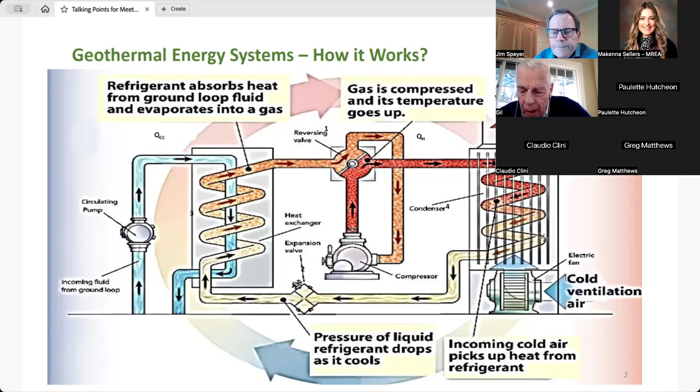Now, let me just say, and you can probably add to this, I was out at the Mountain Towns event just a couple weeks ago in Jackson and had a chance to talk to a lot of people. One of the things I found, which was very exciting for me, was how interested and relevant geothermal energy and other renewable energy is, in Colorado, but in the West and in Montana.

So you're depending on the energy that's been stored in the earth millions of years ago, as the Tetons and the Rockies were formed, that has captured energy from the sun and is stored in rock. And I did a couple cases, I'll come to them in a minute, about the actual applications of geothermal in that area. So in Montana and other Western states, of the people I talked to, it was universally well understood, well accepted. And so it seemed like this presentation and talking about this was very relevant.

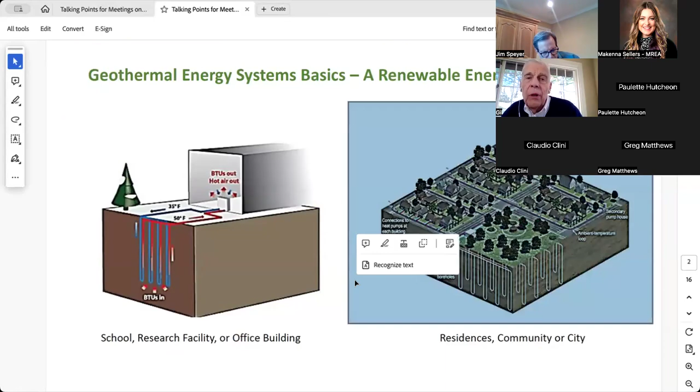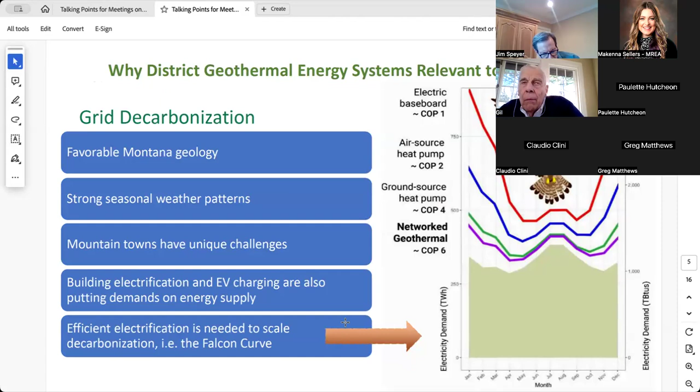Well, it's important because like in a school, in a campus, you can have different temperatures, you can have different ambient conditions in different buildings. And with a district geothermal system, in addition to this heat pump system and taking energy out of the earth, the district geothermal systems interconnect the buildings. So they can take energy that's in one building, say that's warmer at certain times of the year, and use it to warm up other buildings. So it has much more overall energy efficiency.

And you'll see that in here on the purple line right at the bottom, its coefficient of performance is maybe 6. So it's much, much, much higher than the other alternatives. And that's why a district geothermal energy system is such an interesting thing to look at.

It depends on our time and your level of interest, so we can do it in the Q&A. But I've done a number of detailed studies and investigations of actual real geothermal systems. Now, there's lots of hype and there's lots of conferences and there's lots of articles written about these things. But I thought that what would be important is to actually go out and talk to actual installations of these things. So to go back to systems that have been put in 10, 15, 20 years ago, and to see actually how they've performed, and to see what are some of the big characteristics to them. What are the big underlying messages from those?

Hey there, Gil. Would you like that slide up right now? Why don't we come back to it? I think, right now. Got it. Okay. I'll mention it later on.

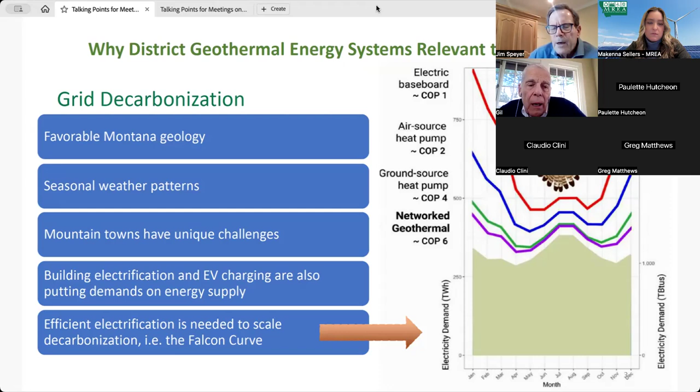Yeah, Gil, you may want to go to the next slide that basically summarizes your review of the existing sources. The big thing for me is you look: reduction in energy costs 30 to 70%. Reduction in electricity usage 25 to 35%, and then reduction in carbon 20 to 40%. Right. So to me, that's kind of the bottom line.

Yeah. Everybody asks that, right? They say, oh yeah, well, we're interested in this, but what are the bottom line benefits to it? And you can see these are sort of statistics that are often asked about. How much effect does it have? And as Jim said, this slide that I have up basically summarizes that. Right. Let me just say a few other things.

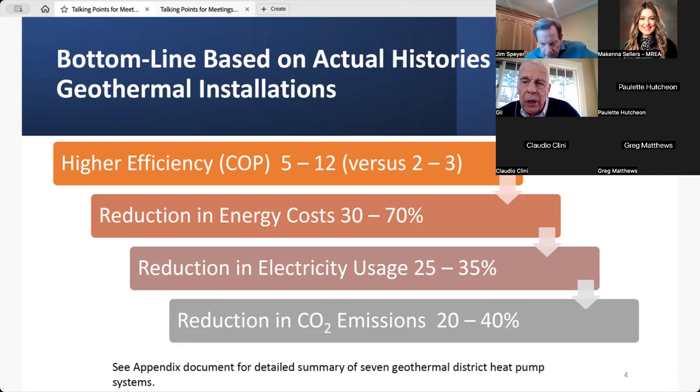So those are sort of the big number things, but there's several other things. Let me quickly go through this. First of all, these systems have been around a long time, particularly in Europe. They've been used since the 70s. So they're not a new technology, but they're a highly successful technology over longer periods of time. The detailed case studies that I mentioned talk about how well the systems have performed. They don't wear out. The operation and the maintenance of these systems holds up well over many years.

The systems work in colder climates, whereas an air-to-air system is getting better because the heat pumps are getting a wider range, but they're still kind of more for temperatures that are more moderate, with less of the extremes that you have, so these are good in colder climates.

They have no, and I'm exaggerating that a little bit, but there's no carbon emissions. In all the other systems, if you have natural gas, for example, which is often the alternative, you of course have carbon dioxide emissions. But the geothermal systems are great because there's zero on-site CO2 emissions, and therefore they're consistent with carbon reduction goals and objectives that you have in towns and cities, and of course the federal government.

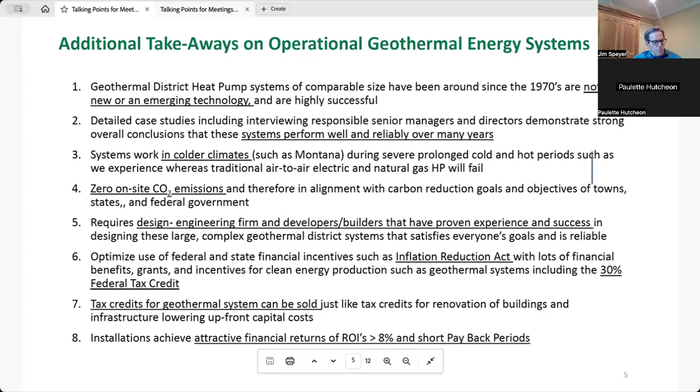One of the things that came through very strongly when I met and actually talked to these different applications, these different schools, is that it's very important to hire a firm, a company that has real experience in the design and the engineering and building these systems. Now, there's a lot of companies out there that talk about it, but what is important is to have a company or developer, builder of geothermal systems that actually has a proven track record.

Because there are big examples I ran across where they didn't do that. They built a system and it failed. So that real experience is very important. We'll get back to that again in just a minute.

Now there's different ways that these things are financed. And one of the issues is often what are the costs, and particularly the upfront costs involved in these systems. Now we're going to talk about a different financial model in just a minute. But if you just look at the upfront costs, they have higher upfront capital costs. But now there's quite a bit of incentives for offsetting that.

So in the examples we looked at, the Inflation Reduction Act, for example, the federal law has this 30% federal tax credit. Then there's also state, local, and other types of financial incentives that can offset that higher upfront capital cost. So the point of these points 6 and 7 is that the financial aspects of these systems are very important. And I'll talk in a minute about a relationship that we have that has a different type of financial model.

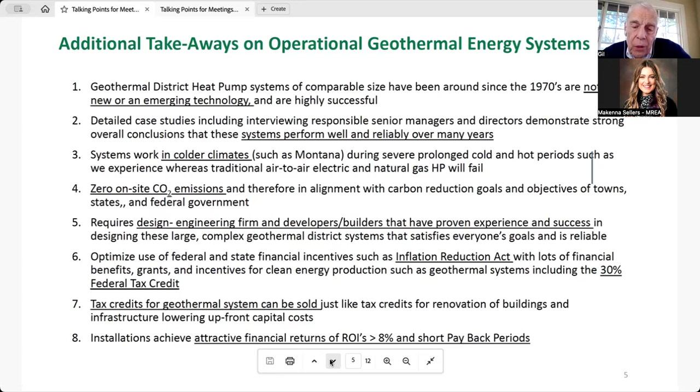So this is an actual system, and just to get an idea, it's 264 boreholes, and the depth of the drilling is 500 to 700 feet. The system provides heating and cooling for, I think it's 8 buildings today, and then 2 more are being added. Those will represent about 700,000 square feet of floor space for the campus, the dorms, the athletic facilities, the classrooms and everything. And that's about 12% of the total campus.

I'm sorry, Jim, did you say something? No, I think it's important to note that they've only covered 10% of the buildings, so there is considerable potential to expand this system at Montana State University. Yeah.

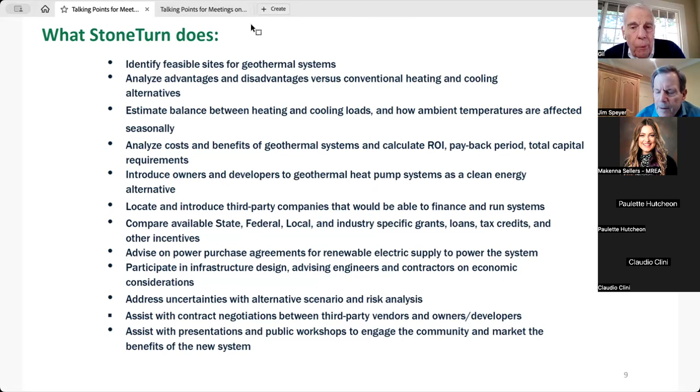Okay. And so in just preparing for this, I tried to think about what would be some of the potential sites in Montana for these systems. And basically it's just by looking around at the website and looking at opportunities. And one would be, of course, University of Montana in Missoula that we've talked about. We also have, of course, done all this work on Montana State and see there's still a lot of potential there. The other places would be schools, high schools, grade schools, and in looking around, there seem to be some very interesting opportunities being looked at.

And then as I've talked to people, particularly at the Mountain Towns event, people said, well, yeah, but also the cities, the towns themselves of Bozeman and Missoula, for government office buildings would be another very good application for this, in addition to schools and universities. And then also research labs. And I see that the Rocky Mountain Laboratories in Hamilton would be another interesting application for it. That's just a sample, but just to give an idea of what are some of the potential sites for these systems.

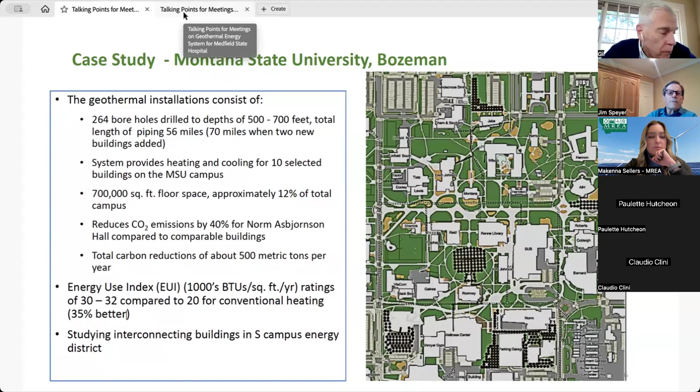Yeah, the real comparison that I think is important is comparing the numbers that I mentioned, the 30 to 32, with what the typical standards are for non-geothermal systems. And there, what I mentioned is in the range of 100 and up to 180 even. So the systems, compared to what the standard metrics are, are tremendously more efficient.

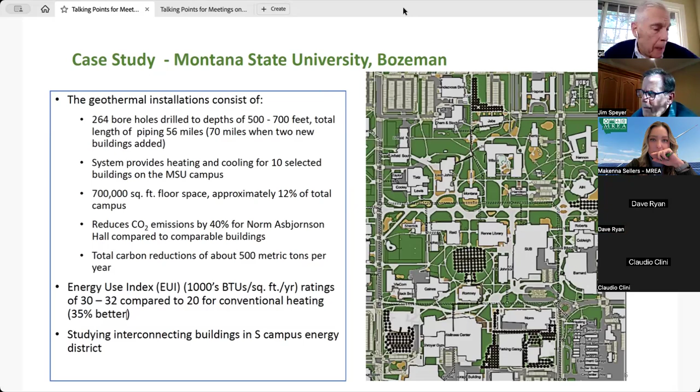Okay, another question here. If Gil or Jim, whoever wants to take this one, could you expand on those COP ratings? If COP ratings are based on the equipment, then how would a COP change given groundwater temperature? I'll get to that slide here while you answer that question. Jim, did you want to respond to that? I think they're really asking how that system varies based on the temperature of the rock you bore into. And I don't know what your experience with that is.

Yeah, I think that the COP ratings that I got from the different schools are averages over the lifetime of those systems, right? Over the 10 or 15 years that they've been in operation. So they're the actual historical ratings of the efficiencies of the systems, given the ambient conditions and the weather conditions present in that location.

Okay, another question in the chat coming in. How do geothermal systems compare to biofuel systems? Are the environmental impacts of installing geothermal outweighed by the energy efficiency, given the equipment and the necessity to dig and have ground disturbance? And are there continuing maintenance access issues with having underground piping? Yeah, okay, a lot of good questions there.

First of all, on the last part, the ones we've talked to have very few problems with the underground systems where they've had to dig them up or something like that. It's very, very seldom that they've encountered those sort of problems or issues; they just haven't become a problem. They're protected.

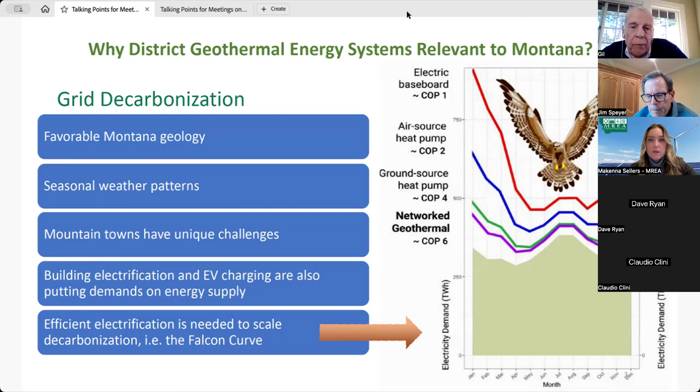And if you'll allow it, I think this is a great comparison chart that you worked on. So I want to have it up while we're going through the rest of the Q&A, because these case studies are so valuable. But I think it ties also with this question coming in from Dave Carlson, talking about their house. They have electric baseboards that fail after 40-ish years or so, and if an air-to-air heat pump has a 25-year guarantee, he is asking more about lifetime, which could be brought to a bigger question: it's not very common for a homeowner or small residence to invest in underground geothermal heat exchange because of the cost barrier. And there's likely more to it, maybe the work involved, that it makes a lot more sense for these district systems at a university or a school.

But could you speak to the threshold in your mind as it stands now for market viability and application? Basically, how big do you have to be for this type of project to be cost effective? And would underground geothermal systems ever be beneficial for individual homeowners? Will the cost ever match up?

Well, okay. I think, first of all, the air-to-air systems. As I mentioned, I have relatives that have some of those systems. There's certainly a role for them, and the technology is getting better. They work well, so there's certainly a role for that. And for individual homes or apartments or condominium units, an air-to-air heat pump system may be the preferable thing.

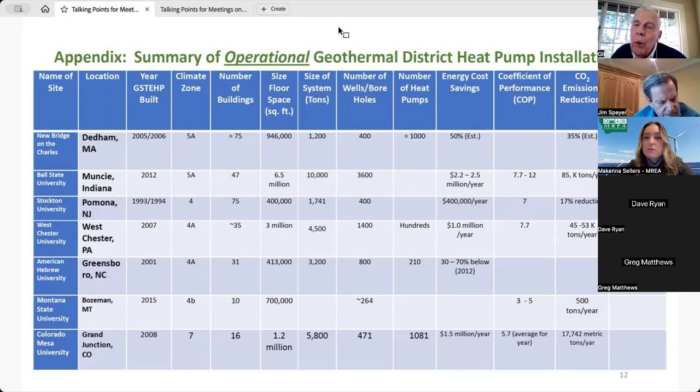Yeah, well, just for Jackson, it's being promoted by Energy Conservation Works and so forth. I can actually find out a list of contractors there. I don't know if they work outside of Jackson, but we actually are making a fair amount of progress having them installed in individual homes. So I can give that list to you, Makenna, to see if any of them work outside of the Jackson, Wyoming area.

Yeah, and again, I would go back to the point that I made earlier, that I'm sure in Jackson and probably around here, there are other companies that are saying that they're experts or experienced in geothermal. What I learned from talking to the senior people from all these sites where a system has actually been built is that what's extremely important is to really find a developer or a contractor that's actually had experience in designing and building these systems,

and not just that they're advertising that they know something about it, because it takes a degree of knowledge about the rock structures, the thermodynamic characteristics of the rocks and the aquifers underground, and how each design for the system is very unique. So it has to be designed specifically for that particular application.